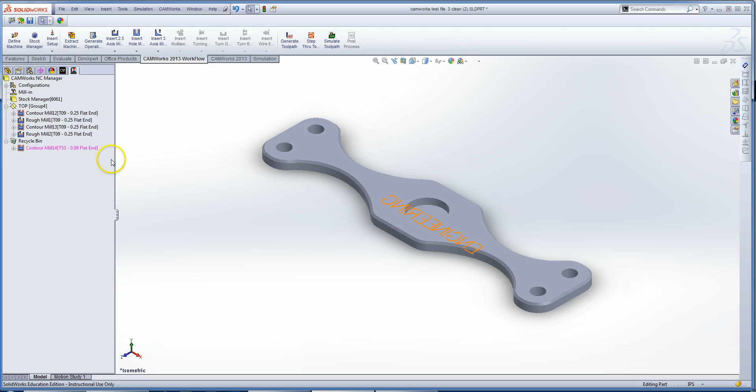Alright, this is part 2 of the CAMWorks lesson. You just saw how this operation did the 4 holes. This second thing here that's in purple, it says contour mill. That's when it would come in a second time and just do a really fine finish cut. So if you want, you can configure that, simulate that. You can also just delete it, because it'll do the 4 holes and they'll look pretty clean.

So now we're basically done with the top, except for you'll notice there is what's called a chamfer here. It's going along the edge. So I'm going to go ahead and do that really fast, and then we'll be done with the top. So I'm going to right click, go to insert a contour mill, and click the part perimeter like before, and we'll do boss just like we did at the first operation. At that point it's made, and so now generate the operation plan.

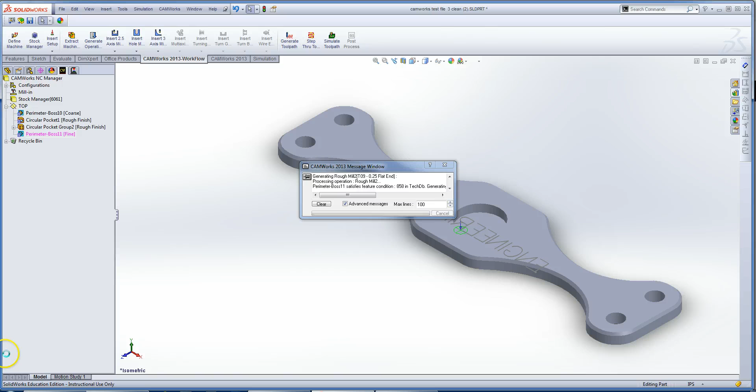After that, I'll go ahead and double click it, and this is where we need to make some changes. To actually physically do a chamfer, you're not going to be able to use a regular flat end mill. So I'm going to go down here and I'm going to pick a countersink, like this one will work fine. I'll hit select,

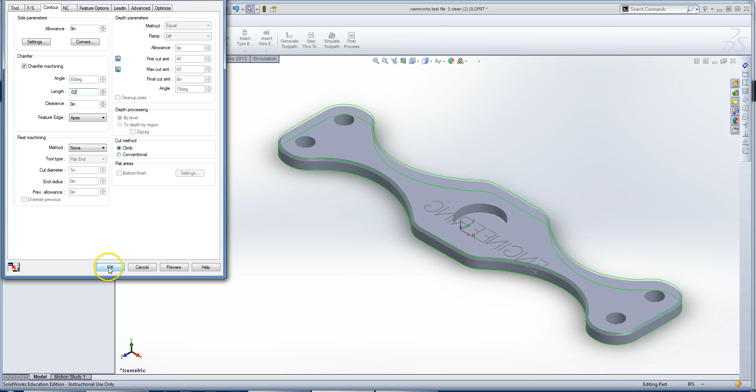yes. After that, we have to go over to the contour tab, click chamfer, and then the length should be the same as what you typed in SolidWorks. So I'll go ahead and do 20 thousandths. So let's go ahead and see if that works. Alright, great. So you can see it did the chamfer like that.

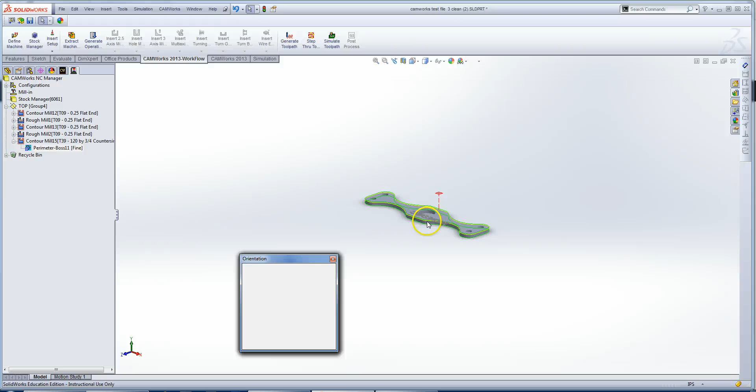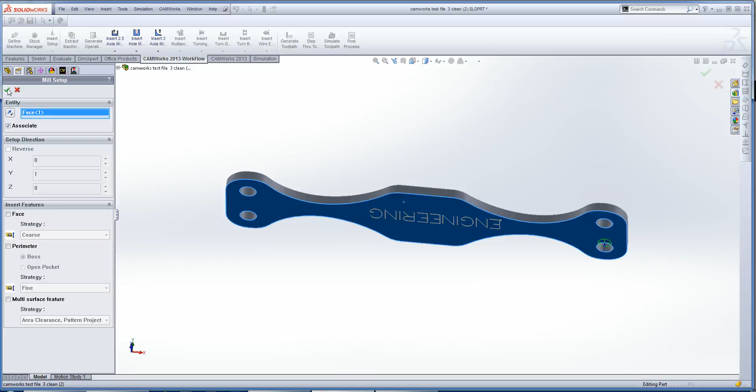So now what we're going to do is the engraving on the bottom. So far we've done everything in this mill setup called top. Now we need to do another mill setup. So I go insert, mill setup. I'll go ahead and click the bottom of this, hit the green checkbox, and here it is, mill part setup 5. I would rename this. I'm going to call it bottom,

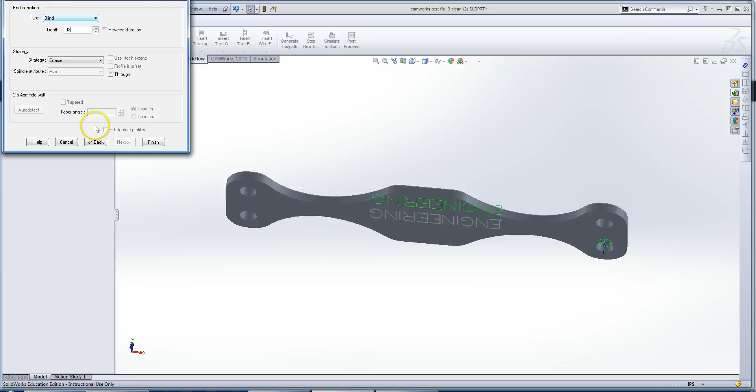and I'll go ahead and do a new 2.5 axis mill operation, rough mill. And notice right here I have my 3 sketches, but if I change this to go to engrave feature, you'll see I have a sketch in SolidWorks called text. So it's important, any engraving you have to basically do this. So I click next. How deep do you want to go? You can probably just specify it. I'll go 20 thousandths blind, and go ahead and hit finish.

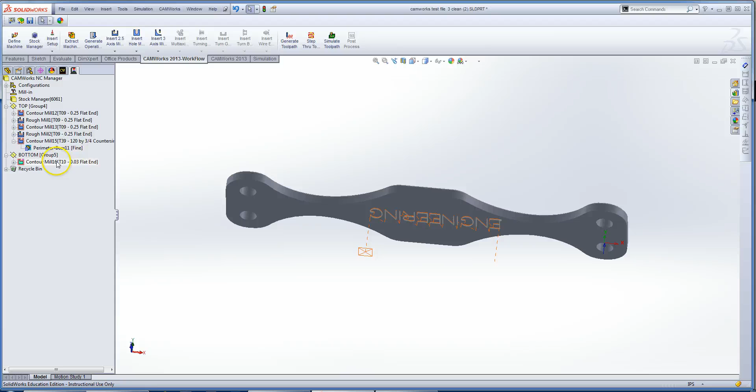Generate the operation plan. Generate the toolpath and simulate it. Alright, so it looks good. And then if I had, say, a hole over here on the side, you'd have to do another new mill part setup. So basically you need a mill part setup for every side that the machine needs to do something with. So in our case we just need 2 mill setups.

Of course I can go in here and change the end mill. I could make it be a V engraving tool or something like that. So the next thing we have to do is configure the feeds and speeds. So all that's going to happen in the CAMWorks operation tree. So if I double click here, we've gone over how the tool works. FS stands for feeds and speeds. And if it says library or tool, I change it to operation.

And this is where you can type in the X and Y feed rate. And this is where I'm going to give a conservative number now that'll be safe, but from this you'll probably be increasing it. So CAMWorks does have kind of a feeds and speeds library, and it helps you figure things out. But to keep it simple, we're going to say for aluminum, using a 1/4 inch end mill, we're just going to do 5 inches a minute. That's a conservative number, so make sure that says 5. And then under where it says NC, there's some things in here that are important.

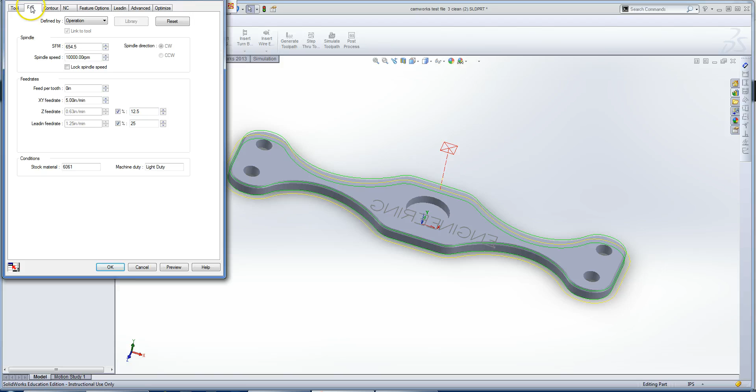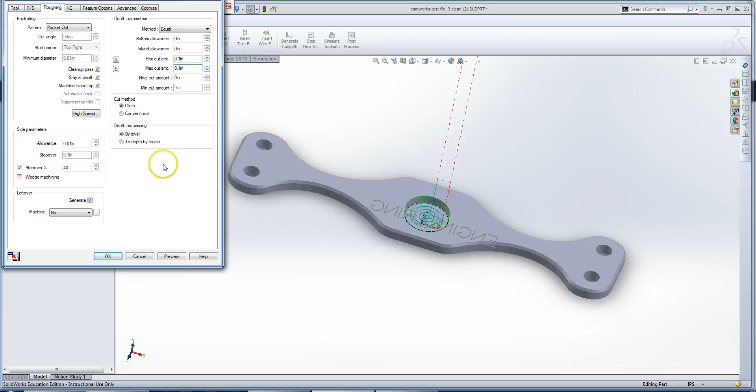But you have to do that with every single one of these. So it takes a little bit of time, but you know, it doesn't actually matter the RPM, since we're specifying the feed rate. Mainly just to get 5 in there, and then make sure these guys are at 100 thousandths. And make sure that's not 5 inches.

So you can do that over and over for all of these things, and it'll just be safe. And we'll have another lesson talking about looking at the chips and things like that. Alright, so the next thing we have to do is post this, and I want to go over what that means.

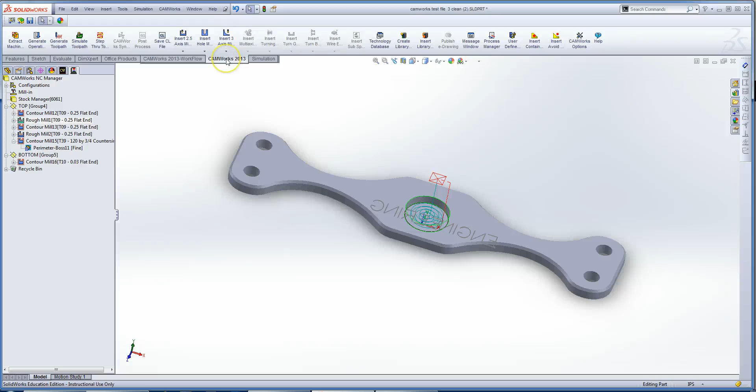Okay, so as far as post-processing goes, you want to go over to the feature tree and double-click mill in. It's probably going to give an error, unable to open controller file. And so if we go to post-processor, what that means is basically it's code that relates to your CNC machine. It's CNC machine specific. So when you buy a machine, it'll come with a post-processor, or someone will make it

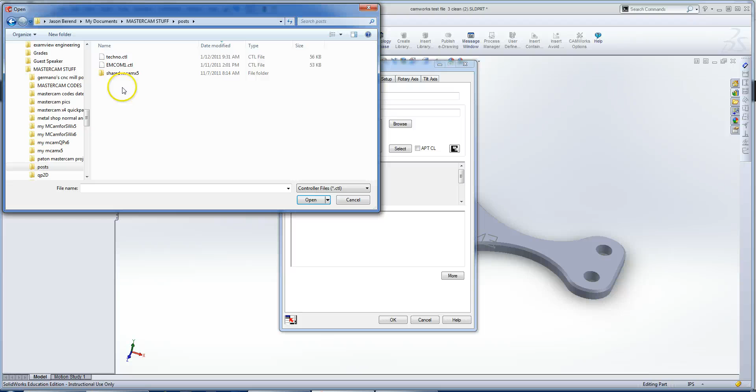for that machine. So I'm going to go ahead and browse, and the two files for our machines are on Blackboard, and they're clearly labeled. So here I have a couple post files, and I'm going to pick the one that says Techno. And it's really important right now that you hit select. Gotta hit select there. So I hit select, and now I'll just hit OK.

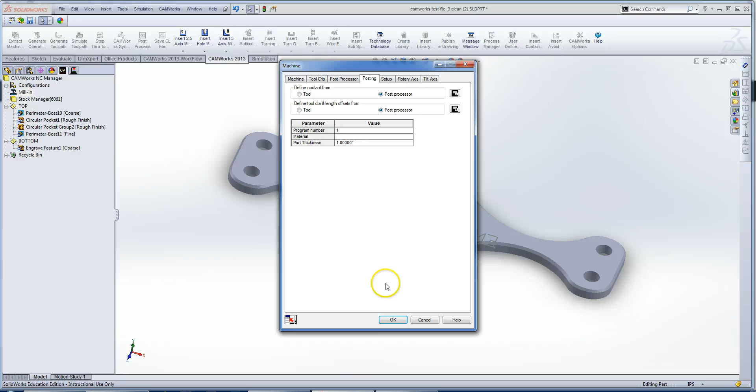Now you'll notice that if you have one of our 10 licenses, this will now not be grayed out, but it'll be clickable. If you have a demo version, you'll never be able to post. It's kind of how they make you pay for it. But if you have one of our 10 licenses, you go ahead and click post, and you want to change the type to be NC, and then just give it a name. I would probably put a version number on there.

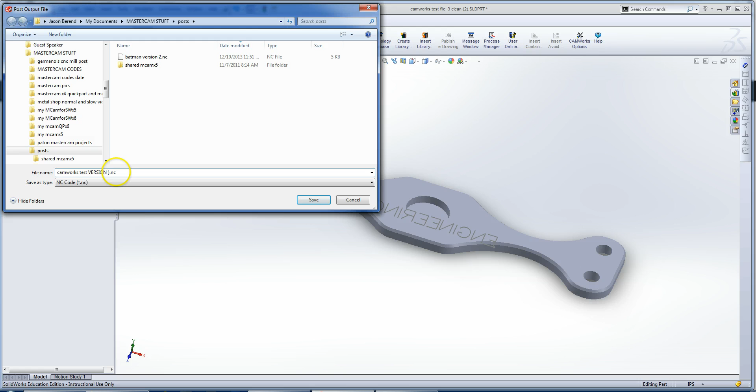Hit save, and then you hit play, and all the code is generated. So basically it took all these lines of code. This is what the machine's going to be looking at, and it's possible to modify this, and there are some YouTube videos on it. If you type in G-code lesson, you can learn how to do this. So if I hit OK,

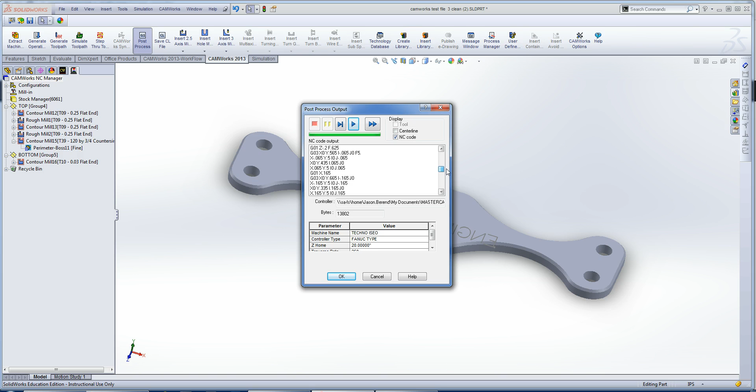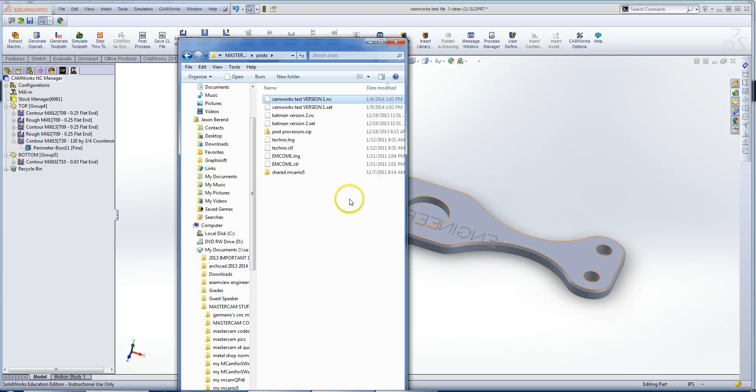then you might wonder where this thing's going to save, and it'll save in the same folder where the post processor was. So here it is, and if you double click this, you can even open it up with, say, Notepad. So there it is. You would take this to the CNC machine and mill your part out. So that kind of concludes the first lesson on using CAMWorks, and then the next step is to actually go make it in the machine shop.